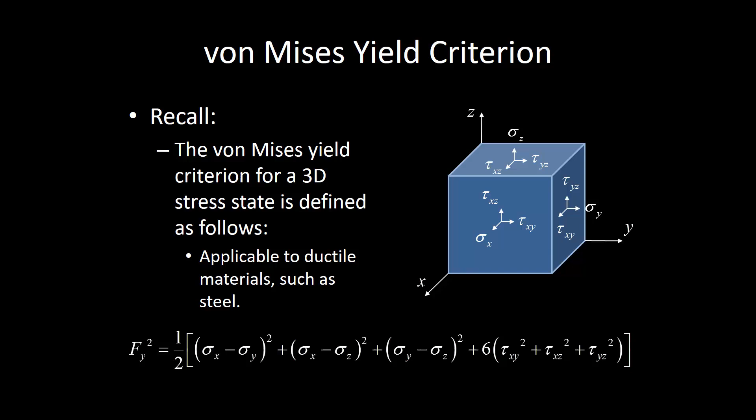Now, if we have an element that is subjected to pure shear, okay, so every other shear stress component is zero other than a given shear stress, we find that that element yields not when the shear stress equals Fy, but when it equals Fy divided by the square root of 3. So if you plug and chug 1 over the square root of 3, it comes out to about 0.577, something like that.

When I teach undergrad steel design, on my first exam I always like to put a little question. I say, why do we multiply all of the elements that are subjected to shear by 0.6? Why do we use 0.6? Why does that 0.6 pop up all over the place? And there's a very simple answer, and it's von Mises, okay?

If you open up the steel manual and you find anything related to shear, whether it's the shear capacity of a beam or the bolt bearing capacity of a given connection, or block shear, it all boils back one way or another to this, okay?

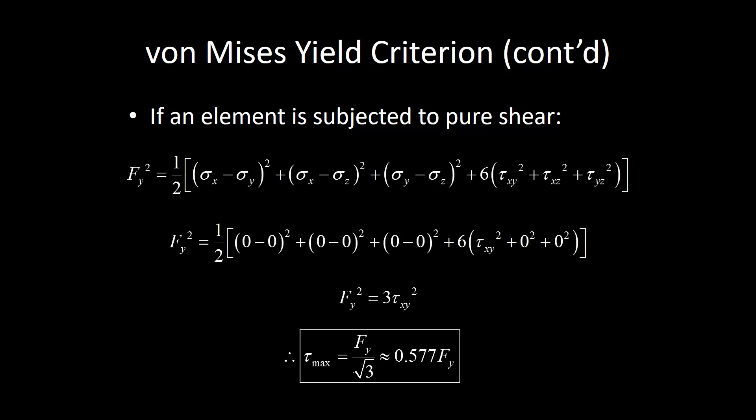Now, the steel manual uses 0.6. The bridge spec decided, nah, we're going to be a little more accurate than that, and the bridge spec uses 0.58. So what I propose to you is that the yielding capacity, or the plastic capacity, of an element in shear, according to the bridge spec, is Fy times the area times 0.58.

Everybody okay with that? Now, here's the thing, okay? Elements that are subjected to shear have the potential to experience buckling. Now, what I mean by that is this.

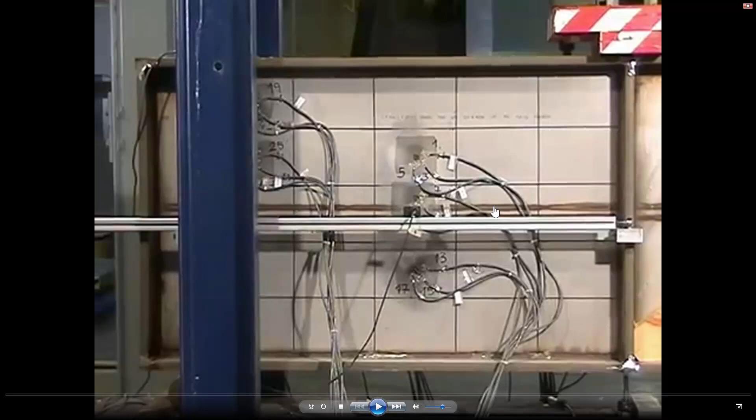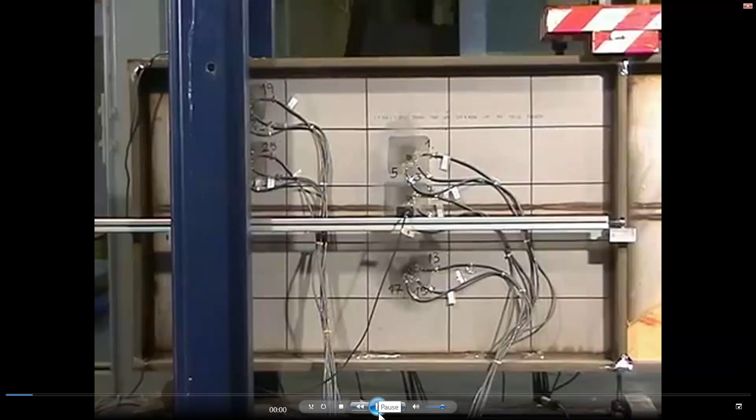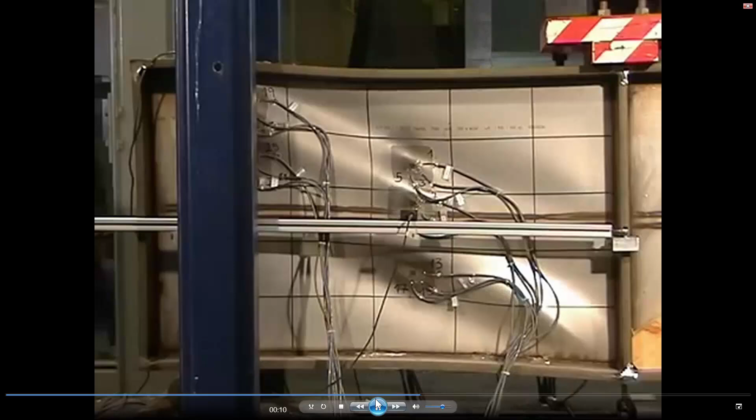So what's happening is I'm taking this element and I'm shearing it, right? Now what we're paying attention to is this web. And what happens is if you apply that load... you notice they've got this time motion, like they're Barry Allen or something, a Flash reference, if anybody watches the Flash. There we go, see, you can see them in the background. A bunch of speedsters.

But if you notice what was happening as the test was progressing is the girder, or particularly the web, was starting to crinkle, right? Now, what's specifically happening is when you look at the stress field, you find that the web is experiencing a compressive stress along this direction, from this bottom left to this upper right. It's experiencing compression, and things in compression like to buckle, right? So that's what's going on, okay?

Now, what we will find with our particular types of designs is that even though that thing is buckled, in most cases we can continue to load it. And by continuing to load it, we develop a tensile field in this girder. Because while this direction is experiencing compression, in that direction I'm yanking on it, and I can yank on steel all day long. So this is what's called a tension field, and we'll attack that later on.

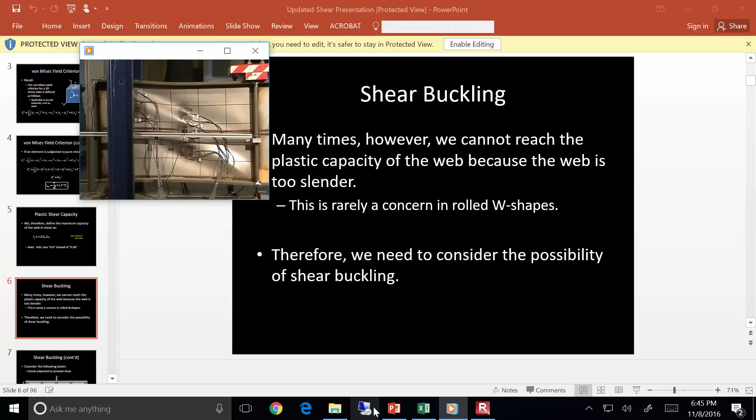For now, I just want to go back to this buckling concept.

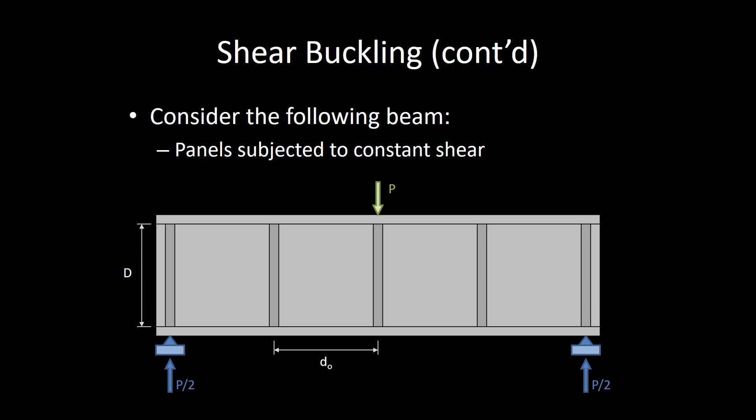Okay, so a little bit on notation. You all should recognize this, D, right? I've been using D to represent the depth of the web this whole time. Well, D sub naught is going to be the width of a given panel. So you've got these stiffeners that are arresting that buckling across the section, and we're looking at this little panel here.

Now, we're ultimately going to consider the two cases of shear buckling: unstiffened webs and stiffened webs. Stiffened webs being ones with stiffeners there. And the main difference is that stiffeners are going to provide what we call a nodal line for buckling. That's just a fancy way of saying that stiffeners act like a brace for the web, okay?

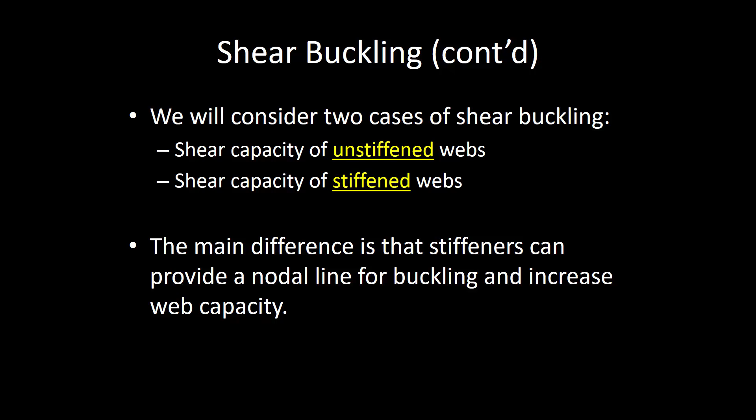Now think you've got a column, and you load that column and it wants to buckle. You can increase the capacity of that column by bracing it, right? That's what a stiffener does for the web. You're bracing the web. When you brace a column, what do you do? You ultimately make its effective length shorter. When you make its effective length shorter, its capacity goes up. Same thing's true with the web.

Now, ultimately, what we're talking about is a plate subjected to stress. I've shown you this equation before - the buckling stress of a plate, like you've seen the buckling stress of a beam or a column. For a plate, we could derive it if we want, but then we get into plate analysis, and it starts to go outside the constraints of this class. If you want to learn about plate analysis, take Engineering 670, we'll talk about it a little bit in there. But for now, just take my word for it that the buckling stress for a plate, a two-dimensional element, is taken from the following equation.

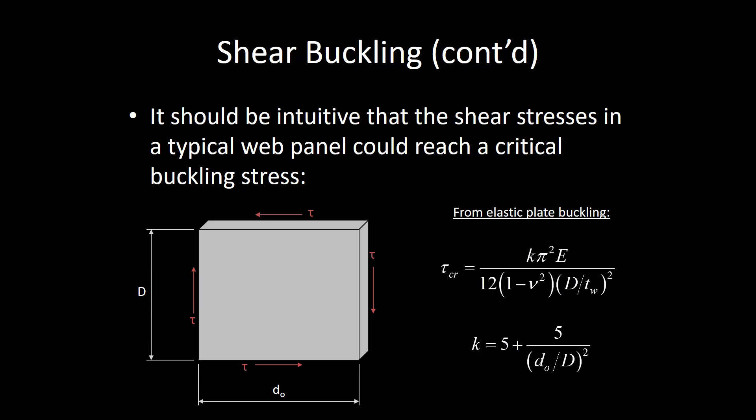Now, K is kind of like your effective length factor, and for an element subjected to shear, it's calculated as follows: 5 plus 5 divided by the aspect ratio squared, that D naught over D. So we've got a panel aspect ratio, D naught over D, and a web slenderness. And that's ultimately going to define the capacity of the web in shear.

Okay, we'll deal with the panel aspect ratio later. For now, I just want to look at the web slenderness, because the web slenderness is kind of like the column slenderness - the more slender it is, the weaker it is. Make sense?

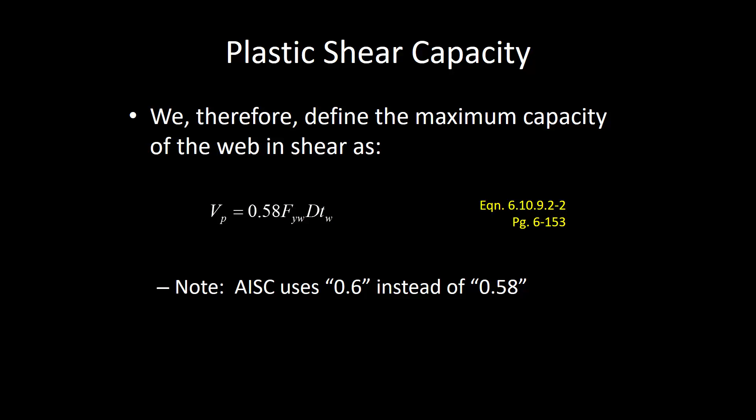Okay, the way I'm going to formulate this is as follows. I'm going to go back to this equation. Remember this: capacity of the web to reach yielding is 0.58 times the yield stress. I'm going to adjust that quantity by a constant C.

And that'll give me the critical buckling capacity of the web. So this C term is essentially the buckling capacity of the web divided by the plastic capacity, which, since we're talking about the same area, is just the critical stress divided by the yield stress in shear, which is 0.58 Fy. Sound good? Should be pretty straightforward.

Now, if I set that critical buckling stress, which I derived as K pi squared E over this quantity squared in the denominator, equal to that critical yield stress, what I can do is determine the elastic buckling limit versus yielding. We can determine when elastic buckling occurs by just solving for C. C is that buckling stress divided by Fy. Go through and do all the algebra, plug and chug, work it out.

And we get that we have an elastic buckling constant of 1.57 times K, times E, Young's modulus, divided by Fy times the slenderness squared. Where are we getting 1.57? It's just collecting your 0.58 here, your 0.58 there, and then 1 minus Poisson's ratio squared, which is 0.3. Just go through and do the algebra, collect everything over onto one side. I think you'll find it's pretty straightforward. Everybody good?

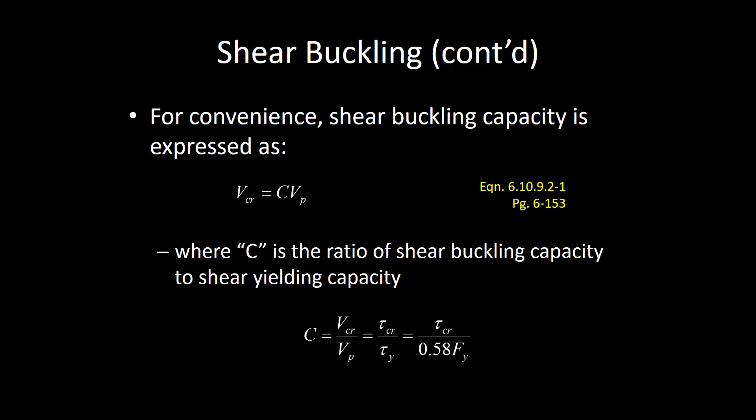Okay, so we have two buckling coefficients. This is what happens if we get elastic buckling, this is what happens if we get no buckling. If we get no buckling, we don't reduce the capacity at all, right? We have a buckling coefficient of 1. Make sense? Because what is C? C is serving to reduce that full capacity to calculate a buckling capacity. So if C is 1, we're not reducing it at all. So we've got full plastic capacity, we've got elastic capacity.

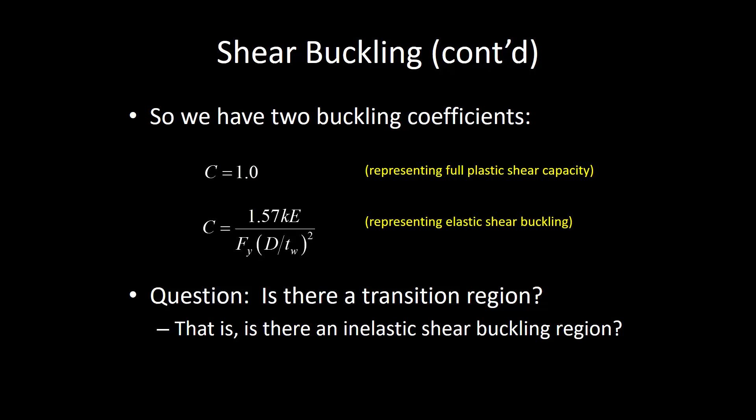Is there an inelastic region? The answer is yes, there is an inelastic region. Remember when we did beams, we had full plastic, we had that linear LTB region, and then the elastic LTB region? Is there an inelastic region here? Yeah, okay. Where does that come from? That comes from tests and experiments and going through the data. What ends up happening is that occurs right around a proportional limit of about 80% of 0.58 Fy.

And that number again comes from folks going down to the lab and thinking to themselves, well, it's a good day to go take some beams and break them or load them to failure. So they go down, they test a bunch of beams, and this is what they find. One particular paper I want to mention is by Basler, because he did a lot of very fundamental work in steel research, and a lot of the stuff I talked about last week and the week before, and tonight, is derived from his work. He was very influential in this field.

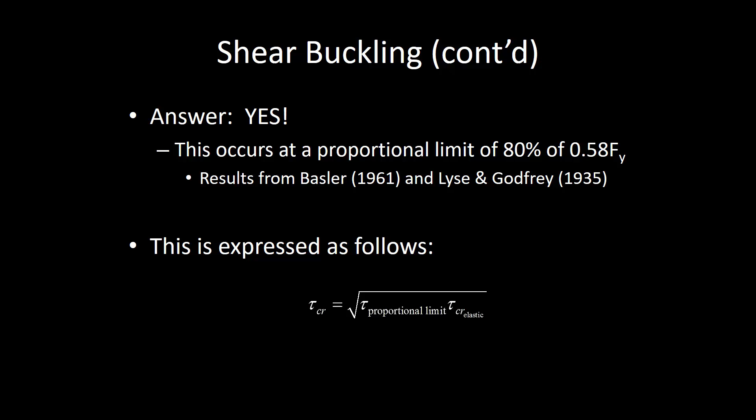So we determined, based on experiments, that inelastic buckling occurs at around 80% of that yield stress in shear. If you notice where I'm determining this buckling coefficient, I've got this proportional limit times the elastic capacity, and it's funny how this 0.58 just sort of randomly pops up -- the 0.8, not the 0.58. The 0.8 just sort of randomly pops up. Where does that come from? Again, it comes from experiments.

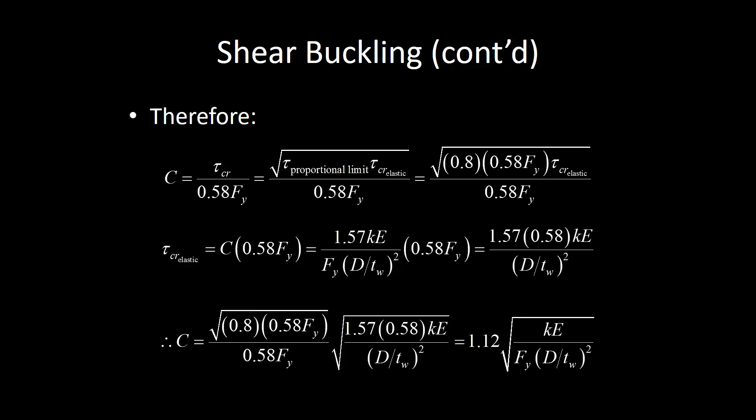So I take these two terms, do all the algebra, rearrange everything, and solve for C. If you look here, I've got a lot of terms that are constants. Pull all those out, calculate this, and I get the following. Everybody okay with this? So this is an expression that calculates the shear buckling coefficient of a given web. It's a function of the web slenderness, the material properties -- E, Fy, and so on -- and that term K. The equations may look a little nasty, but all in all it's really just plug and chug. Everybody okay with that?

Now, if you look here, it says page 6-154. If you go to your spec and look at the top and see 6-154 -- I'll even turn to it with you -- see this column of equations right here? That's all that is, and ultimately it's pretty simple and it's pretty plug and chug. Sound good? All right.

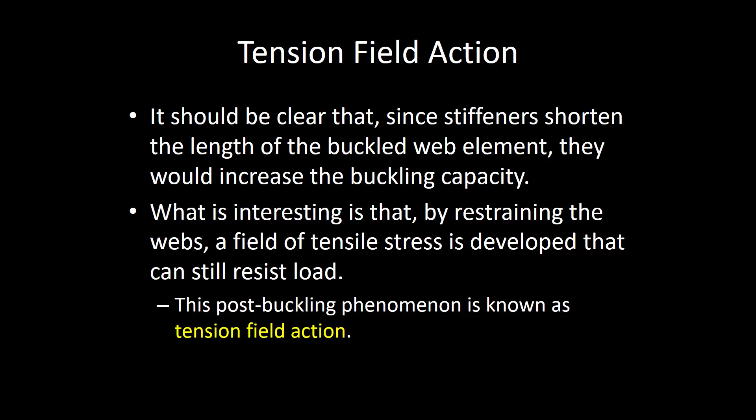Going back to that test we did before, looking at that stainless steel girder, we loaded it and it buckled, but the question is, can we load it past that? And the answer is yes. It's really nifty in steel beams. You can load it, it can buckle, and then you can keep loading it if we're talking about a stiffened element in shear. That phenomenon is called tension field action.

If we have an element that's being loaded in constant shear like this, when it buckles, it does something like that. So here's the element, it buckles, it kind of does that. Those web elements lose their capacity to resist shear in that fashion, and they just sort of deform as follows.

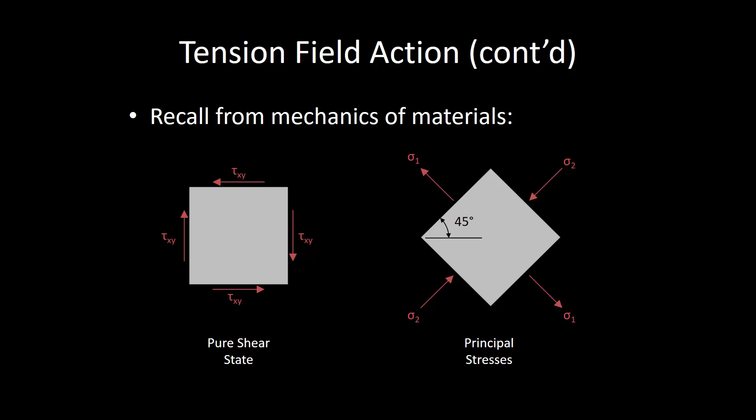Now let's go back to some basic mechanics. Mohr's circle, okay? That's bringing it back, right? It's probably been a while since we talked about this. It's ironic, I teach mechanics of materials or mechanics of deformable bodies this semester, and I did this morning, talked about Mohr's circle. So I have an element that's subjected to a stress state, and what Mohr's circle allows us to do is rotate that stress state and get a new set of stresses. Now, an element that's under pure shear reaches its principal stresses at exactly 45 degrees. That's our principal orientation. What ends up happening is in one direction, you're experiencing tension, the other direction, you're experiencing compression. Just go through your mechanics of materials textbook, set sigma x and sigma y equal to 0, and you'll find your principal orientation as follows.

Now, what ends up happening is this, okay?

So this is a test that was done at the University of Missouri. This was actually done by a guy I do a little bit of research with.

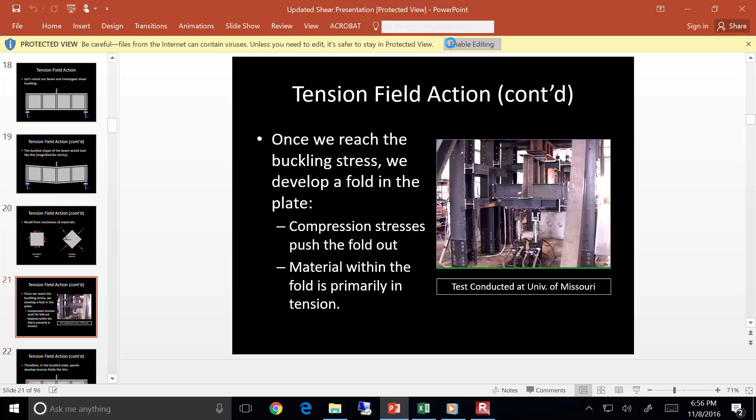Let me see if this is gonna play? Oh, come on. Actually, let me hit enable editing. Maybe that'll work. Enable content. Yes. There we go.

All right, this was done by a colleague of mine, a guy I do a little bit of research with. This was done at the University of Missouri, and he's now faculty at the University of Wyoming. What he was trying to do is look at tension field action in hybrid girders, where you have different flange stresses. He wanted to see, can we get it? Can we achieve it? And yeah, we can. So that was the long and short of it. But he was doing a shear test on a series of sections. So if you look, he's going to do a sort of a 360 view of the section.

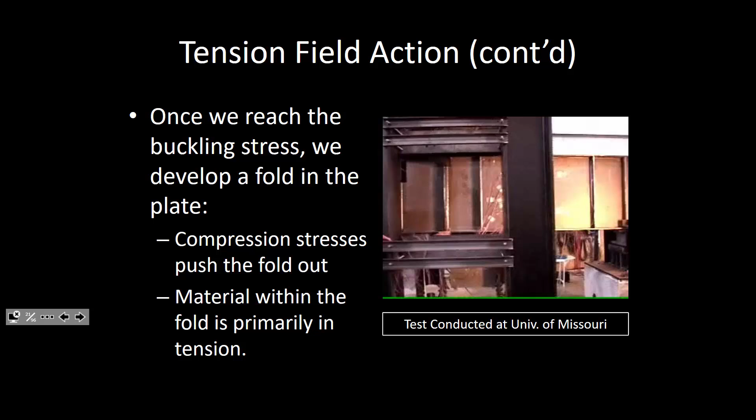This is the element that's being tested, and he's got multiple actuators on it. You can see here right at the floor, he's got an actuator that's going to push up on it. And he's sort of walking around. This is the element that's being tested, the one that's got the light shined on it. You can see a whole host of strain gauges that are being placed on this. So he's sort of going around.

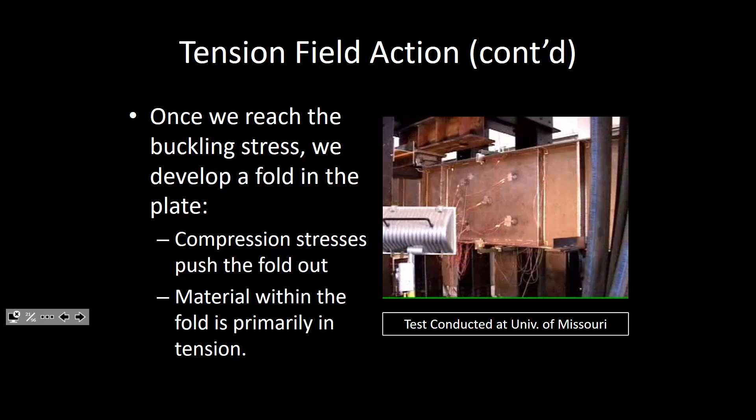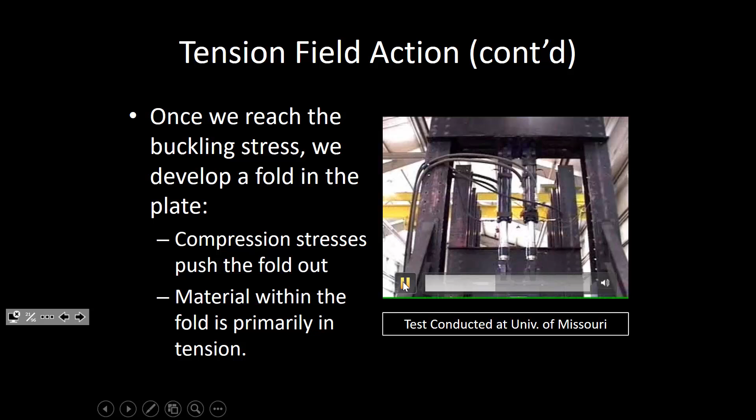Let me see if I can skip past the panoramic a little bit. So you can see it's braced on the back end, and you can also see that other actuator loading it on the top. Now here he's got what are a series of what are called string pots. These are measuring the deflection as the web goes in and out at a series of locations, and then also, of course, a number of those strain gauges.

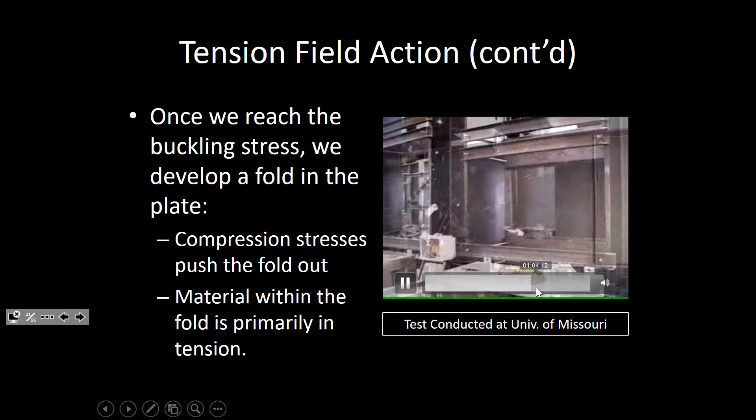Okay, now here's during the test. So we're loading the girder, and you can see it goes, right? But it's not like the girder just falls down and explodes. There's a point when it kicks in and it starts resisting that load again, because again, it has lost its capacity in this direction. But in this direction, oh, it can still accept load because steel loves to be yanked on. So it develops what's called a tension field.

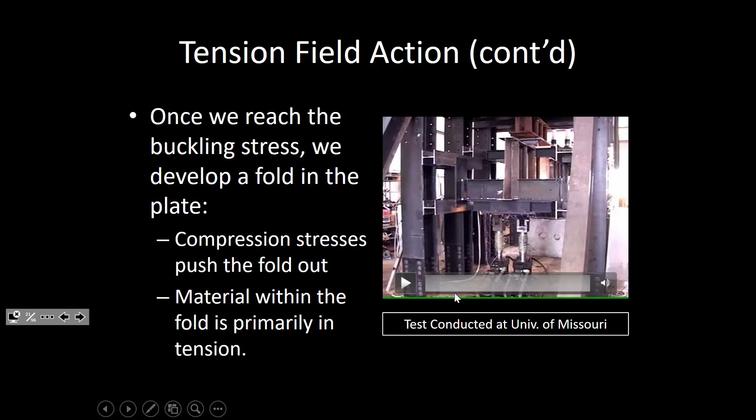And he goes through and he really zooms in because he wants to, oh, now, what the heck? I hit pause and missed the dramatic moment. Now he zooms way in because he wants to look at the surface of the steel.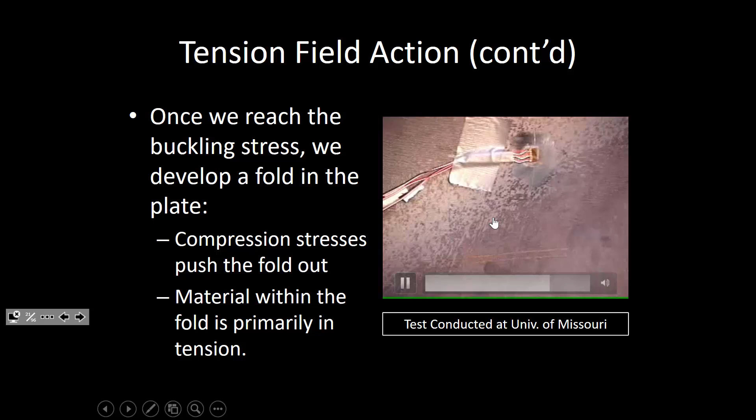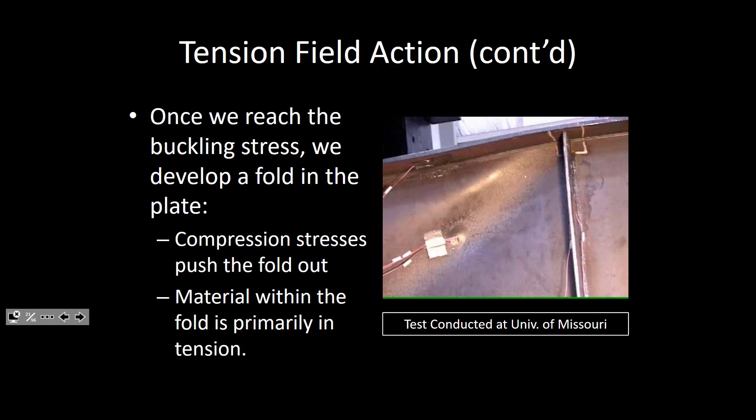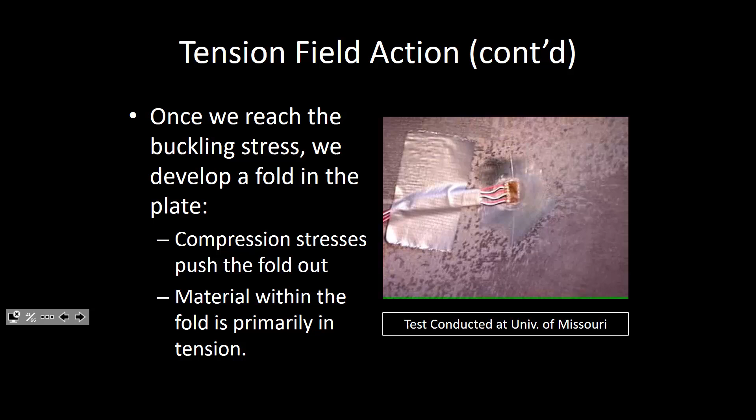Notice how there's a lot of this stuff that's flaked off the steel. Notice how the steel is at a different color. What happens when steel yields is that it begins to experience a large amount of deformation. Right there at the surface, it flakes off. Those are called Luder's bands, that's sort of the name of it. But it gives you a visual representation of what's yielded and what hasn't.

If you look at a lot of black and white photos of steel tests where they've tested steel and they've loaded it inelastically, like beam to column connections and whatnot.

What they do during the lab test is they actually take the girder and paint it with essentially lime, a white powdery substance. So when you look at the test specimen, it looks like it's been painted white, but it wasn't paint, it was this powdery lime substance. The idea is once they load it and it starts to yield, that white stuff starts to flake off, so you can take a picture and see where it yielded. So, food for thought.

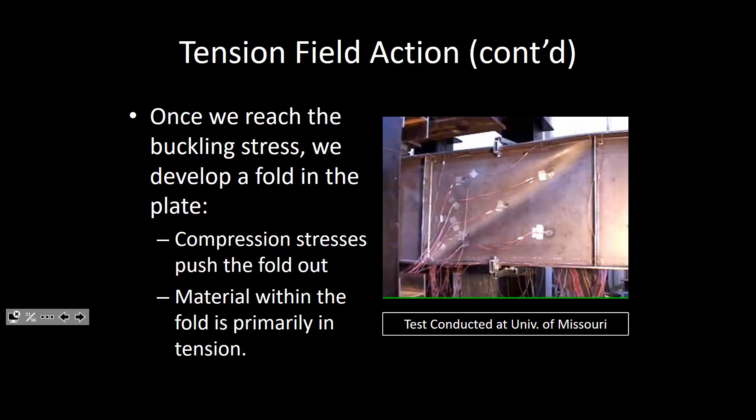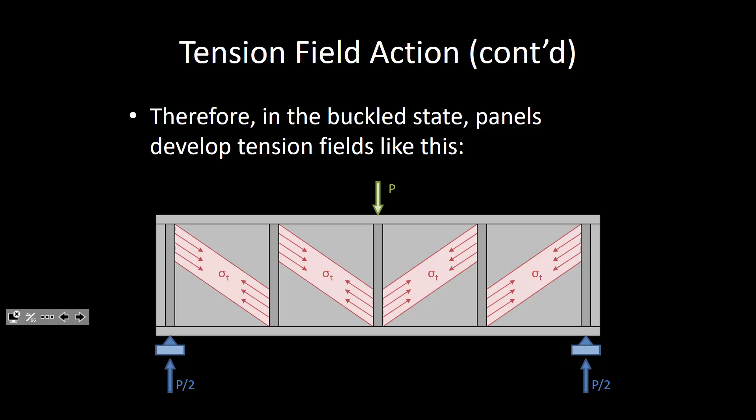Now what happens is you develop a tension field that looks something like this. So I load the girder and it can still start to accept load in that tension state. Make sense? So I propose that the nominal capacity of an element in shear is a combination of its buckling strength plus whatever increase in capacity we get from the contribution of tension field action.

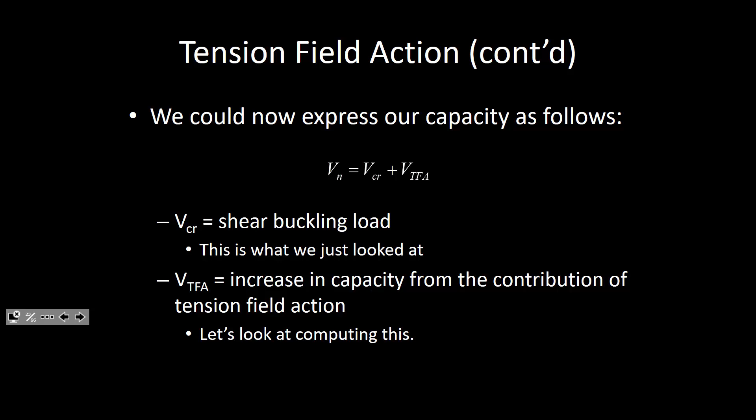Now that tension field force, we're going to have to explore that a little bit. It's going to take a little while, and the derivation may get a little nasty. I'm going to do my best to make it as painless as possible.

So if I'm looking at a single stress field, just a single field by itself, that's a big point to make. I propose that the force we get in that field is the stress times the area. So the stress is sigma sub t - I don't know what that is yet, we'll get to that. The area is the width of that field times the thickness, which in this case is the thickness of the web.

Now, if we're talking about the force in shear, we're really talking about the force that can be developed along one of those stiffeners. So really all I care about is that vertical component. So I take that force and adjust it by the sine of theta, and that tells me the vertical force, the shear force that I can count on. Sound good?

Now, a couple things to point out. Some of this stuff is pretty basic, but it's going to change our derivation up a little bit later. Now the flanges are doing work at the same time - they're having to resist the moment. So the flanges are contributing moment capacity to the girder. They also have very low vertical stiffness.

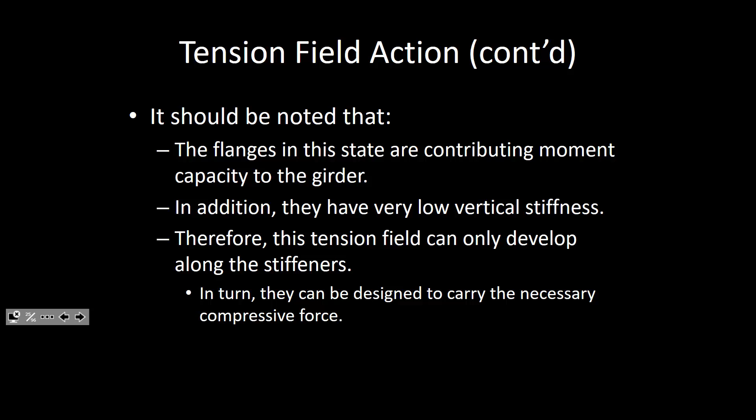In other words, the only place I can develop the tension field is along this vertical stiffener. I've got a tension field going from here to here, and a tension field going from here to here. I don't have really any tension fields developed along the flanges because they're doing enough work - they've got to resist all the bending moment, and they don't have much stiffness this way. You ever been in a fab shop, just pick up a strip of steel by itself - it has about as much stiffness as a wet spaghetti noodle. It doesn't have much stiffness that way. Make sense?

So I'm going to do a little bit of trig based on those assumptions. I don't have an element or a stress field along here. I'm going to do a little bit of trig to see if I can get rid of some of these unknown terms. Now, I propose that if you do all the trig and the geometry, and say, if this is the web depth and this is the panel width, what is the width of that field S? Go through and do all the trig and analysis, and you find it's d cosine theta minus d naught sine theta. You all can do the calcs to see that.

So I'm going to take that definition for S and plug it in here. That's sort of what I like, because I want to eliminate any term I don't know. Like I don't know what that sigma sub t is, but we're going to tackle that in a little bit. And I don't know what that S is - well, now I do. Based on those reasonable assumptions of behavior, I can plug and chug.

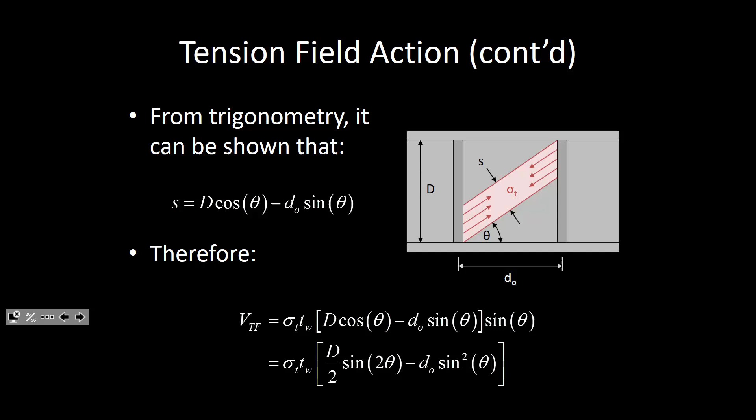Now, what we want to do is look at worst case scenarios. So I want to look at the maximum force I can develop in that stiffener. So you all are engineers, you know all about math. I'm going to break out the C word - a little bit of calculus.

I know you hear calculus and it just causes nightmares, right? Well, I want to determine that extreme shear effect that I can get in that stiffener, so that means taking a derivative with respect to that angle, because I want to determine the worst angle or dimension for that stress field. Because as my angle changes, my stress field is going to change as well, sort of a worst case scenario.

So the derivative with respect to theta, go through, you all are engineers and mathematicians, you can take derivatives all day long. Take the derivative with respect to theta, simplify, and there you go. Now, if I'm trying to determine what theta is, I can take that derivative, set it equal to 0, and solve for theta. So I have D cosine 2 theta minus d naught sine 2 theta equals 0.

I can say, all right, let's determine the tangent of 2 theta, d over d naught, go through and calculate all that. How did I do that? Well, taking this, add it over here, so d cosine equals d sine, then sine over cosine is the tangent.

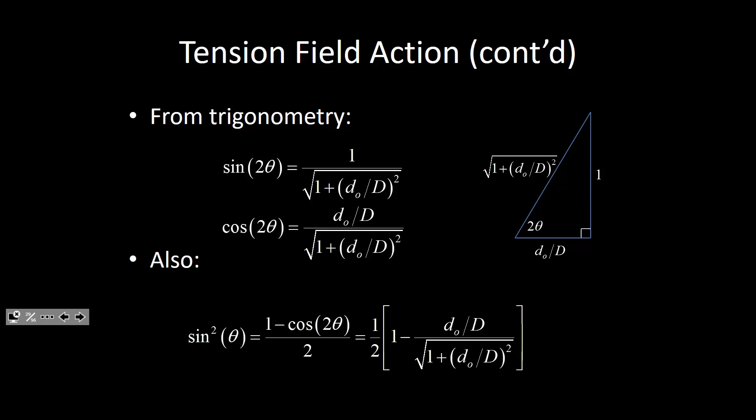Referring back to the simplification I made a little bit ago, do a little bit of substitution, a little bit of simplification. And while the equation looks like it got nastier, it really didn't, okay? In fact, it got a whole lot easier to deal with because now, look at this. I mean, look at what we had before, okay? All right, here was our equation before, and you think, well, that's easier to deal with.

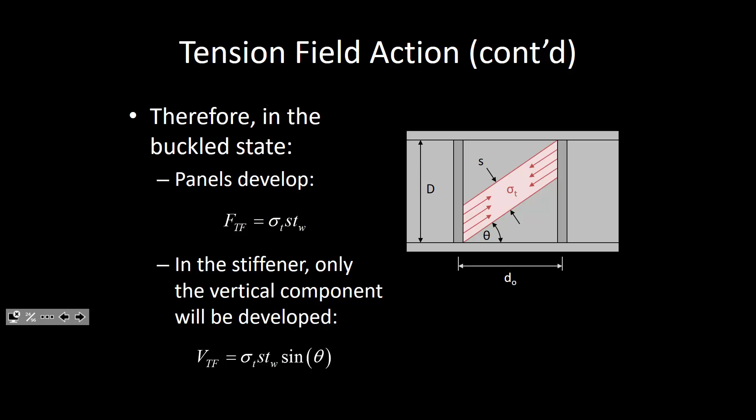Not really, okay? It's based on an S that we didn't know, and it's based on an angle that we didn't know, it's also based on a sigma t that we didn't know, but we're going to handle that here in a second, okay? Now, this equation might look a little nastier, but look at it. It's a function of d, the web depth, that's a dimension, 60 inches, whatever it is, the web thickness, and d sub naught, however far your stiffeners are apart. So while the equation got a little nastier, it's now a function of stuff that we know. That's the whole point, okay?

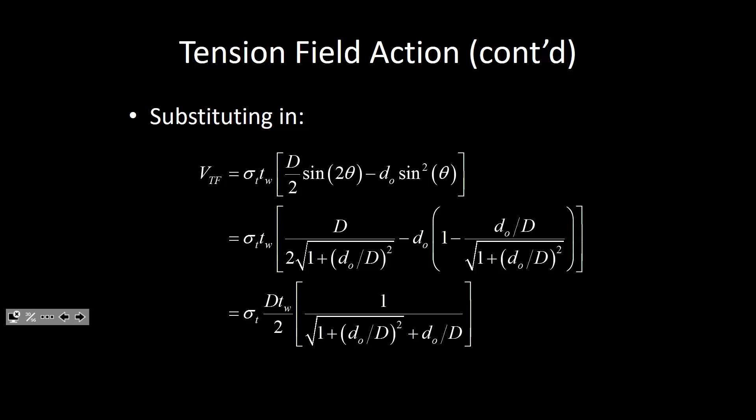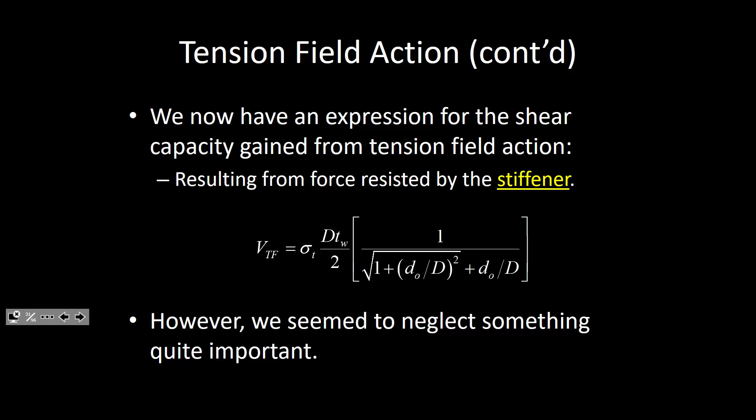Make sense? All right. Now, okay, so we have an expression that is related to, that will tell us what is the tension field capacity that we're developing based on that stiffener. And that's what we get, okay? Everybody okay with that? Now, we've neglected something that's pretty important.

And the big thing that we've neglected is the beam itself. And what I mean by that is we've looked at developing some capacity due to the development of a single tension field, okay? But we're sort of looking at this in a little bit of a binocular fashion. We're saying here's the panel, we're looking at it with tunnel vision. We're looking at its tension field capacity. We're not looking at anything else.

This is a beam with shears and moments and all sorts of stuff going on. Taking into account the fact that the beam is developing its own shear capacity and moment capacity and whatnot, we need to take into account that beam behavior. What the heck is going on everywhere else, okay?

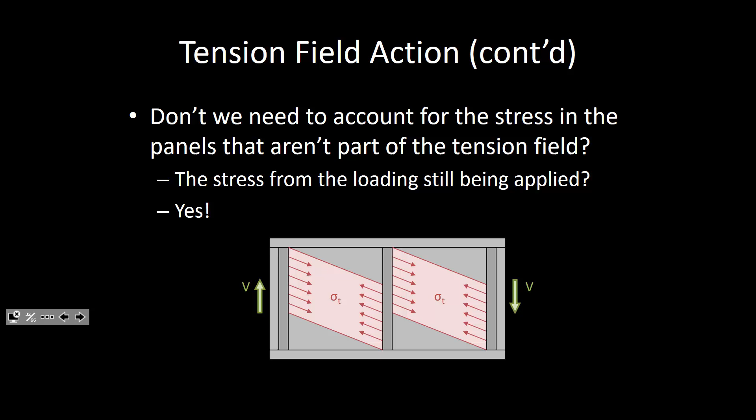Can we get a benefit from that? Well, the answer is, yeah, we actually can, okay? Now, what I'm going to do is I'm going to cut myself out a little chunk of this beam, and I'm going to look at the equilibrium and see what I can come up with. So I'm going to sort of cut out a little chunk to look something like this, okay? So what do I got going on? Well, the first thing I've got is this stress field, right? Stress field going on. Now, I've got a shear on either side.

I propose that the shear on either end has to be half of whatever we've developed from the tension field along that stiffener. I think it's pretty reasonable.

Now look what's going on with the flange. I got a force in the flange, but I got a force plus a delta. Why is that? Because, think, shear and moment. The flanges are carrying the moment. Even though I got constant shear, I got a change in moment, right? Goes back to the fundamentals you learned in structural analysis or mechanics of solids, where you first learned shear and moment diagrams.

I propose that the same thing should technically be true for the web. The web's going to be carrying a little bit of bending force as well, but it's going to be pretty negligible considering what's going on. We're talking about some pretty high shear regions here, so we'll neglect that.

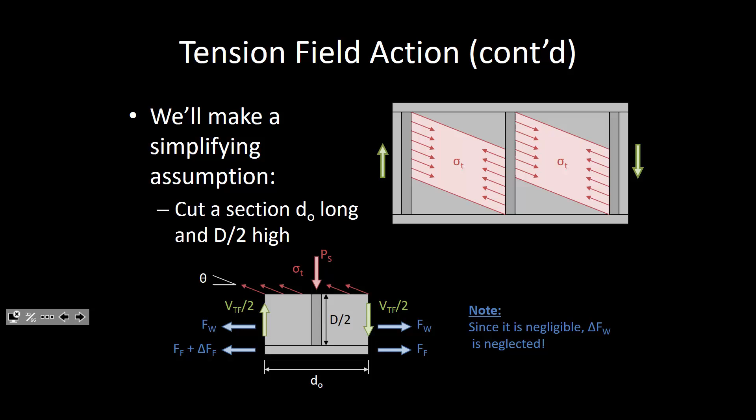The last force worth mentioning is this P sub S, that's actually a potential compressive force that's going to happen inside that stiffener. So we use a little bit of equilibrium. Our good friend, the sum of forces in the x direction, has to equal zero.

These cancel. The F sub f's cancel. I got delta FF going to the left. That has to be equilibrated by our tension field. I guess I should actually have that over there for sign convention, but that'll be all right.

What is our field that we're developing? What's the tension field that we're developing? Well, it's the stress times the area, but we also have to take into account the trig because that's going to be split up into x and y components. So there we go. That change in flange force is just going to be developed from that tension field.

Summing moments about, let's say, the center of the section, a lot of these are going to cancel. For instance, the web force. Got a web force going this way and a web force going that way, it cancels. I've got my stiffener force going right through that, it cancels. In fact, the only component that generates moment is this delta F here at a moment arm of d over 2, and the shear force couple, VTF over 2, times that width d sub naught. Why did that matter?

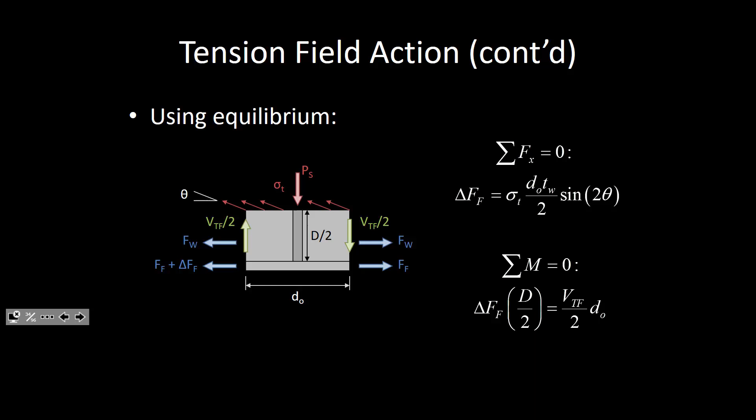Because I'm setting these two equal to one another and solving for this. So what I wanted to get to was this: we've got two expressions we can use for tension field action. If we're looking at the tension field by itself, which is what we had before, we get this. The tension field plus that beam behavior, we get that. They're pretty similar, right?

The only thing left we have to solve for is sigma sub t, the maximum stress we can develop inside that little tension field. Now, everybody okay on this so far?

Don't worry if the mechanics are a little funky. This is a pretty simple process, and I think you'll see how this goes. It's really not that bad.

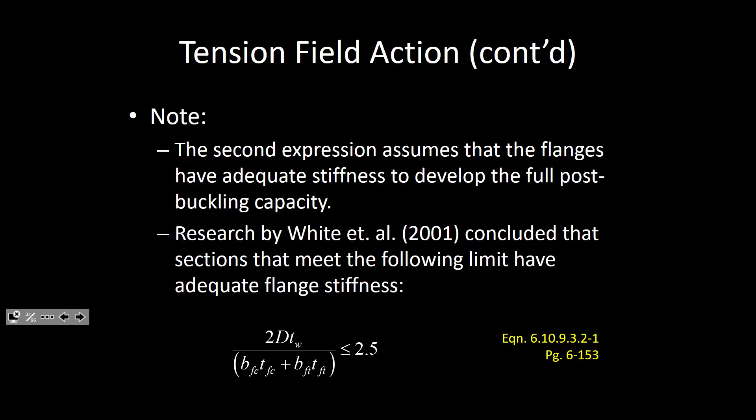Now, this is the behavior of the beam if all it can do is develop a tension field. If you can count on that beam bending action, you can get a little more capacity. This expression actually ends up being a little larger in magnitude than this one. Where's the dividing line between where this occurs? That came from a lot of research done out of Georgia Tech, and there's a pretty simple plug and chug expression. If this limit is met, you can count on that beam behavior. If not, you've got to go with the straight tension field.

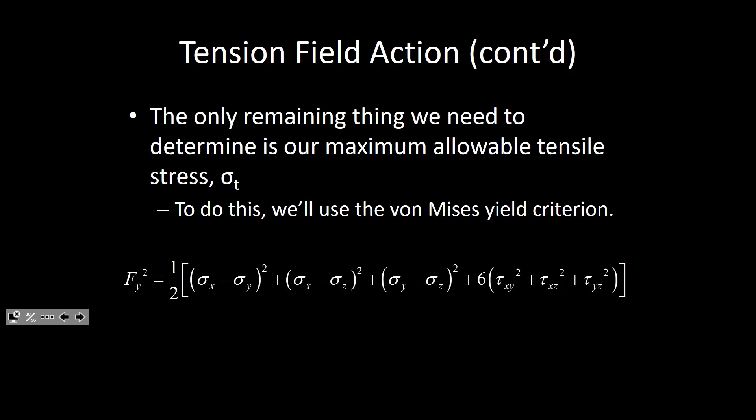Pretty straightforward. The last thing we got to do is solve for that sigma sub t, and that comes from von Mises.

Now, what I'm going to do is make this a little simple. We're going to go back to an element of pure shear, and we're going to assume that we've got 45 degrees. Now, in pure shear, we've got one element experiencing tension, one element experiencing compression.

Now I propose we're talking about post-buckling capacity. So we've got tau critical going this way and that way. What we're trying to determine is that additional sigma sub t.

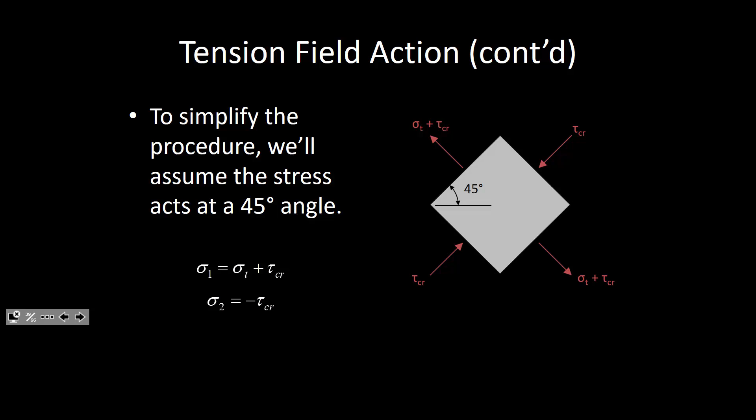So see what I got going over here on the left? I've got a principal stress like this that's tau critical plus that sigma sub t. Sigma sub 2, that's a compressive tau critical. Everybody okay with that? All right.

So plug and chug into this little nifty expression, and I get this. This is what's called a yield surface. And if you look at this, this is really the equation of an ellipse. Looks something about like that. Now, ultimately what we're trying to do is look at a region that's somewhere in here, because this would be pure tension, this would be pure shear.

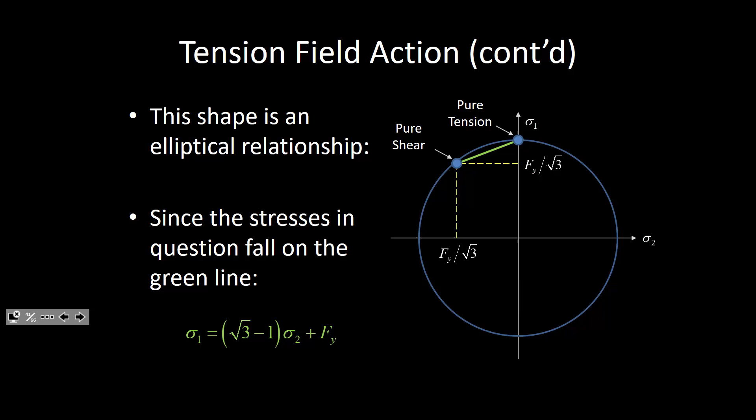So really what I'm trying to do is capture the effect in this region. I'm an engineer, I don't like ellipses, so why don't I just do a straight line? Let's use a straight line fit, and that straight line fit is this equation down here. That's just a nice little y equals mx plus b for that little region. That's all we really care about.

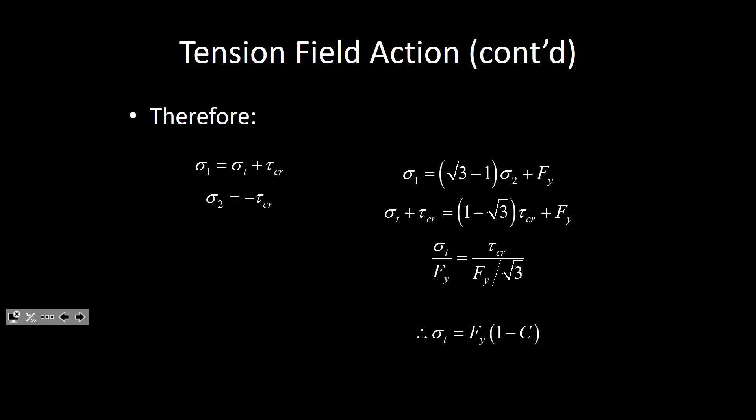Plug and chug, I get a nice little expression for sigma sub t. It's Fy times 1 minus c. Go back to the fact that our nominal capacity is the critical buckling stress plus whatever we can get from the tension field. Plug and chug, and that's what we get. Nice little plug and chug expressions.

And if you go back to the spec, what was it, page 153 and 154? There you go. Nice, pretty little plug and chug expressions. Everybody okay?

In terms of determining the capacity, here it is. This is all there is to it. So if you have an unstiffened web, no stiffeners at all, then everything I've been talking about is complete junk, and it's either shear yielding or shear buckling. That's it. But if you do have stiffeners, which is more often than not what you're going to need in a longer span design, you have to go through the process.

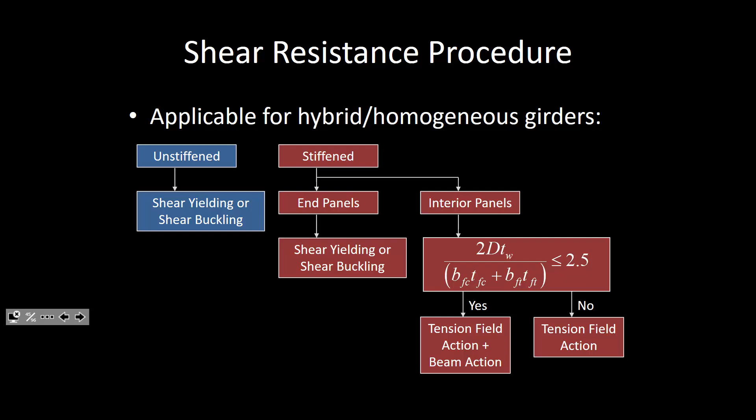If you have end panels, we're not allowed to use tension field action on the end panels, and I'll talk about what that means here in a second. Interior panels, it's a function of whether or not this limit is met. If it is, we're allowed to use that beam action formula. If not, just the straight tension field action. And there you go, pretty plug and chug.

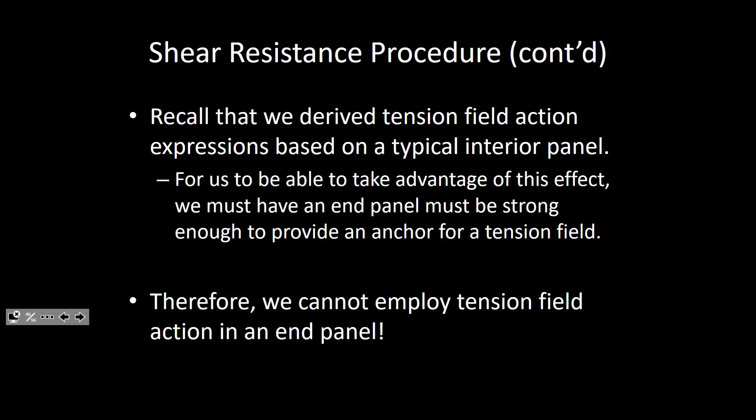Plus, keep in mind a couple things. All those derivations that we just did, we were looking at a typical panel on the inside. That's point one. And point two, in order to develop those tensile forces, we have to have a pretty strong anchor on either side. And here, well, there is no anchor, there's nothing going on. So we're not allowed to use tension field action in that end panel.

Now, if we are going to use stiffeners, we got a couple things we got to keep in mind. For an end panel, the maximum panel length is 1.5 times the depth. If we're looking inside, 3 times the depth. Sound good? Okay.

What we're going to do is this. I want to look at the following example. This is not, let me be clear, we've been doing that same problem throughout the semester. This is not that problem, okay? This is a different beam, but there's a reason for that. This beam is a little more flimsy in shear. It needs a little more attention when it comes to stiffeners, and that's for a very specific reason, okay?

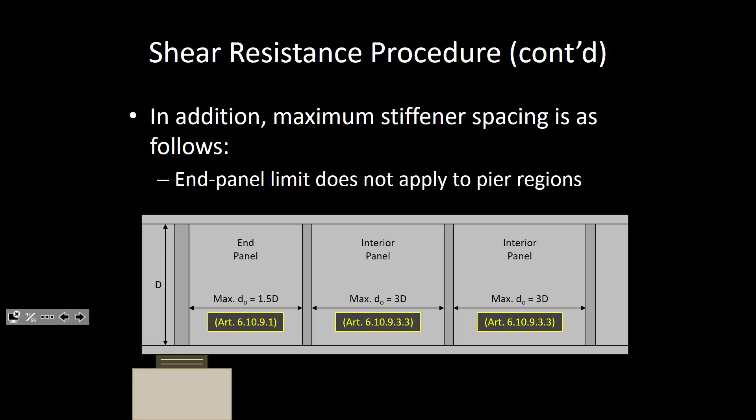A couple things to point out. We've already got a cross-frame layout for this girder, and we'll talk about that later. But it would be really nice if when we're placing our stiffeners, we could put a stiffener at the same place that there's a cross frame, because if we can double up and use the same element to connect our cross frames and also serve as a stiffener, it saves money. Stiffeners have to be welded in, and that's time and money we'd like to avoid. Sound good? Okay.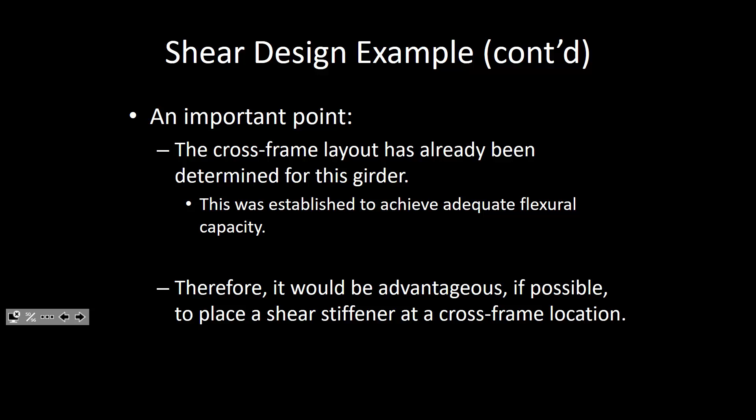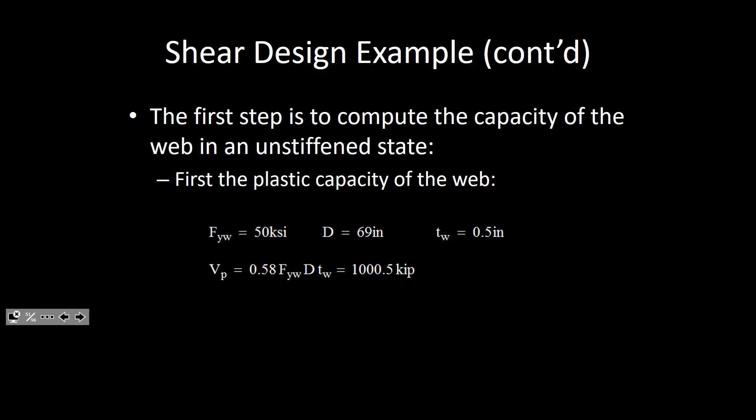Now, the first thing we're going to do is compute the plastic capacity of the web. The web is 69 inches deep, it's a half inch thick, it's 50 KSI. The plastic capacity is 0.58 times 50 times 69 times the thickness. Plug and chug comes out to just over 1,000 kips.

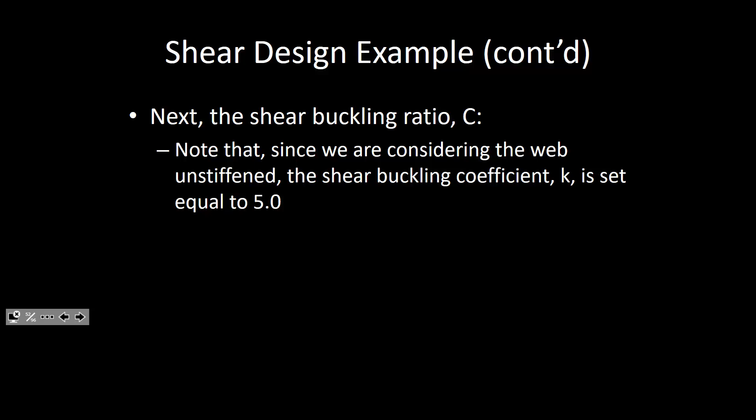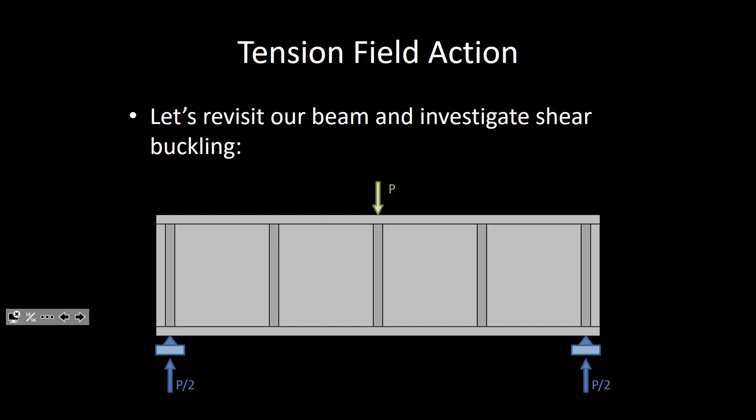Now what I'm going to do is determine the buckling capacity of this web, assuming we didn't have any stiffeners on this thing at all. No tension fields, no stiffeners, nothing. Let's just assume what is the capacity of this web by itself. So essentially, no stiffeners at all. In fact, this term K, I'm just going to take K to equal 5. Let's just determine the raw capacity of that web by itself.

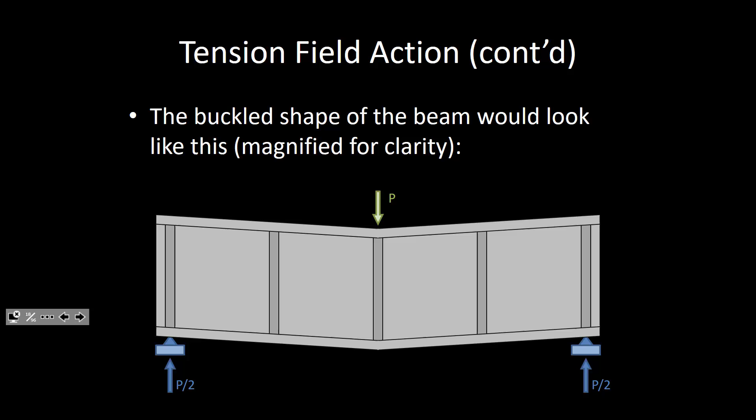So the raw capacity by itself, we're going to take K to equal 5. Here's what I'm looking at, remember that three-part equation. First thing I'm going to do is find these limits. 1.12 square root of EK over FY comes out to about 60. 1.4 square root of EK over FY comes out to about 75. Now the web slenderness is 138, so we're way over here.

And if we're way over here, here is our buckling capacity: 1.57 D over TW squared times the quantity EK over FY. K is 5, E is 29,000 KSI, FY is 50 KSI, and D over TW is 138. Plug and chug, and you get a buckling coefficient of about 0.24, 0.239. So the nominal capacity of that web in shear, assuming there are no stiffeners at all, is about 240 kips. Everybody okay with that? 240 kips, keep that number in your head.

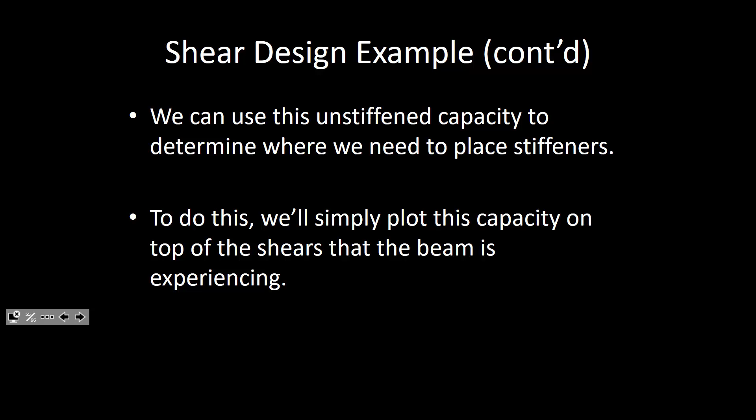Now, I propose that anywhere that number is larger than the factored shear, we don't need any stiffeners at all. We don't need them, right? So let's see what the factored shears are.

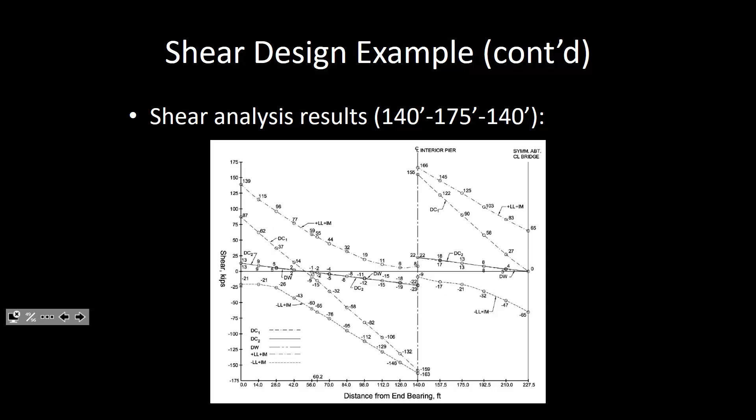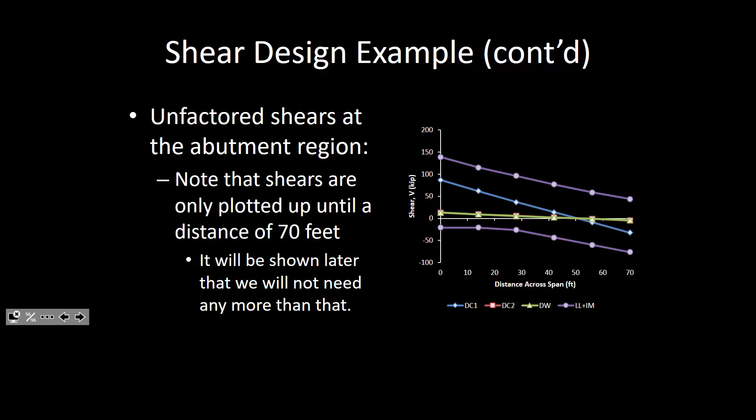So here are the shears from x equals 0 all the way across the span, and I got that from the analysis, which you all have, we've done stuff like this before. The shear dead loads should be DC1, DC2, and all that. So what I'm going to do is only look at this first beginning region, from the first abutment sort of towards the main part of the span. Now I go through and do our strength 1 load combo, 1.25 DC plus 1.5 DW, and so on, and here's what we get.

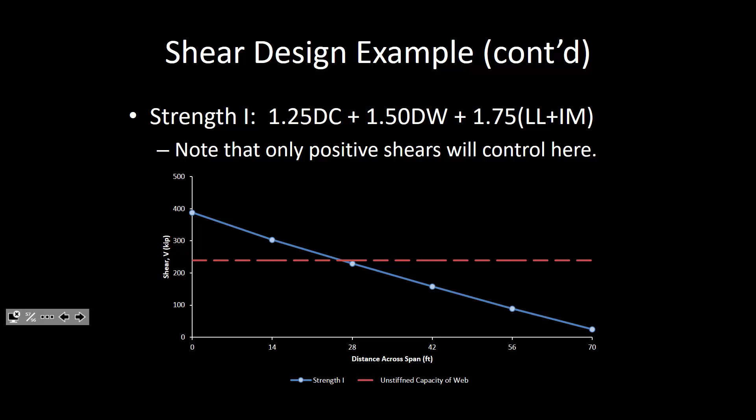Look at this, the maximum shear we're getting right there at the support is like 380, 390 kips, something like that. With no stiffeners, the web can only resist like 240. So I propose everywhere here we've got to have stiffeners. The web by itself just isn't strong enough.

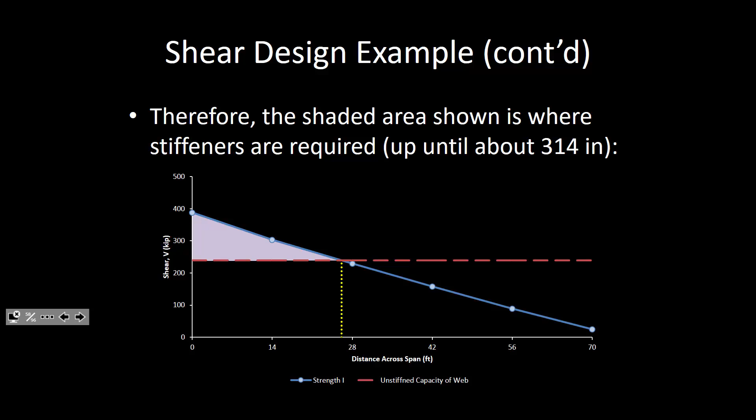So from x equals 0, right there where the support is, I drive along the bridge and I hit 314 inches. From right there at the beginning of the bridge, 314 inches out, I got to have stiffeners there. I don't need stiffeners past that, just in that region. This is an important thing to do when you're doing this analysis. The first thing you've got to figure out is where do I even need to put stiffeners?

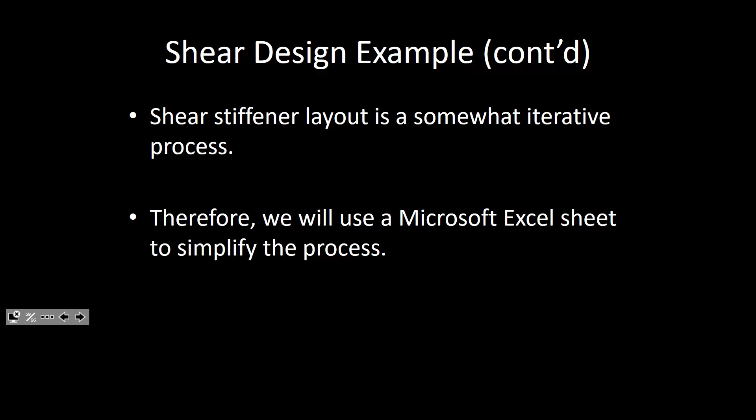Stiffener layout is iterative, and we're going to use Excel. What I'm going to do is this. It is 7:23. Why don't we take a little break, and when we come back, we'll go through the stiffener layout process. I think you'll find it pretty rote, pretty straightforward, and then we'll talk about sizing those stiffeners.